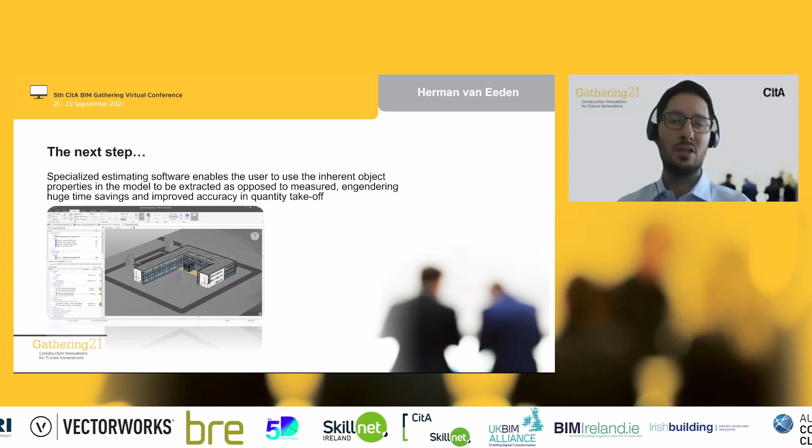So the next step, and the way that we will try to alleviate this, is for us as quantity surveyors to also come out of the dark ages, so to speak, and keep up with the technology, having some technology of our own that helps us take off and give us improved accuracy of these quantities that we love so much.

And what that translates to in our solution called iTWO costX is it enables you to do a rapid analysis of comparative designs and run different scenarios through the process a bit faster, giving you a whole project cost idea and the time savings associated with extracting those quantities quicker.

It gives you increased accuracy, like I said, with greater certainty of the cost. It also gives you live links between the elements that you see on the drawing into your estimate or your bill of quantities, with apparent benefits of that.

And it gives you the ability to feed back into the design team a bit faster or at an earlier stage, and makes the approach a bit more collaborative, involving yourself in the design process as well.

I'll swap into iTWO costX to give you a short demonstration of the solution. I've got it open already, and for those of you who have never seen it before, I unfortunately will not spend the time to go through a full demonstration.

I will just show you a brief demonstration of it, but we have a wealth of resources on YouTube and on our website, and we are happy to do live demonstrations for you as well if you are interested in seeing what the solution is capable of in its entirety.

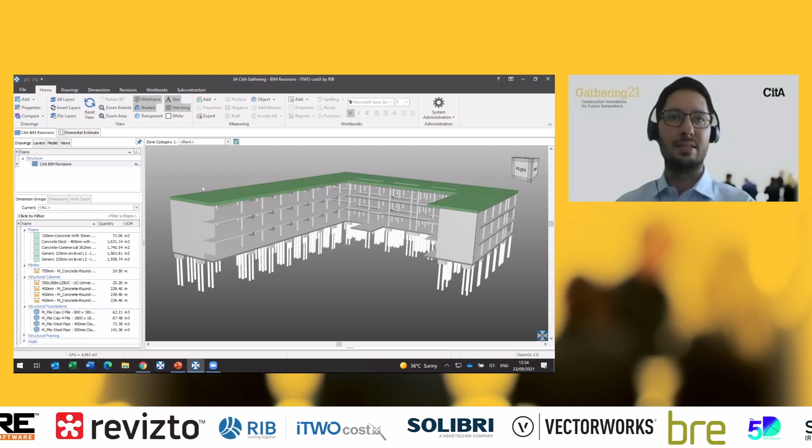So in short, we basically have what we call a dimension view, and you can see that on the left-hand side. This is where you would have all of your drawings as well as your dimension groups. Then we have the costing view where we have our workbooks, and this is where you would have your estimates or your bill of quantities.

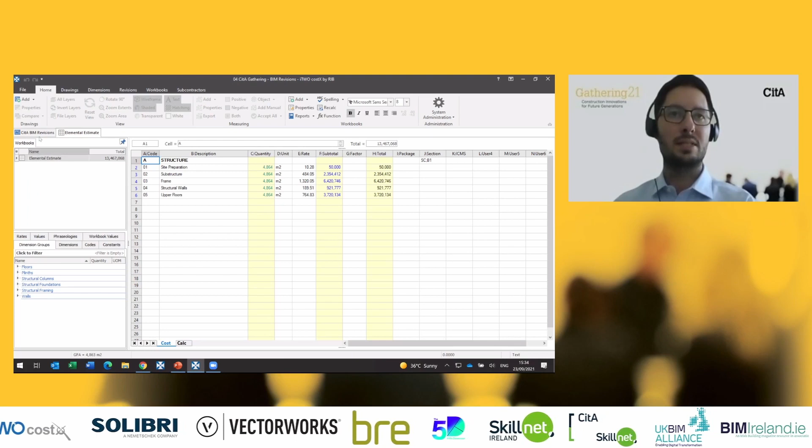So on the dimension view where we have our drawings, you'll see I've got a 3D drawing imported in here already. It's a very basic structural model. We support quite a few different 3D or BIM drawing types, Revit being one of them, and then IFC and DWFX being the two that are probably the most widely used and the recommended ones in terms of performance.

Within costX, you can import the model and explore the model and all of the object properties associated with that model. So the benefit of this is you can go and find and see what it is in the model that you will actually use for your descriptions and in your bill of quantities or in your estimate.

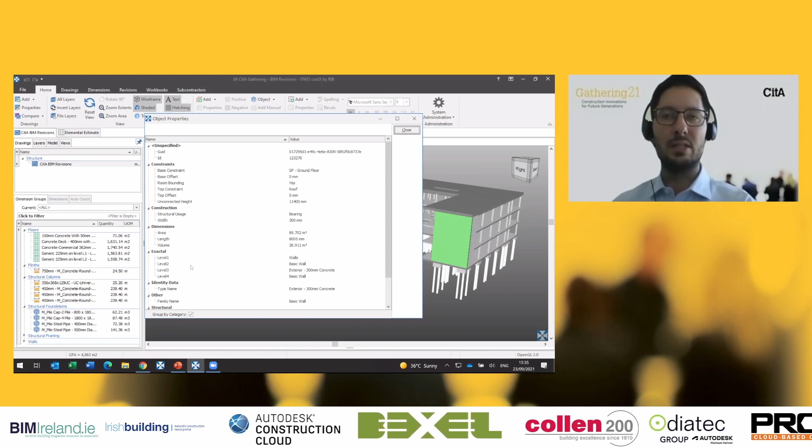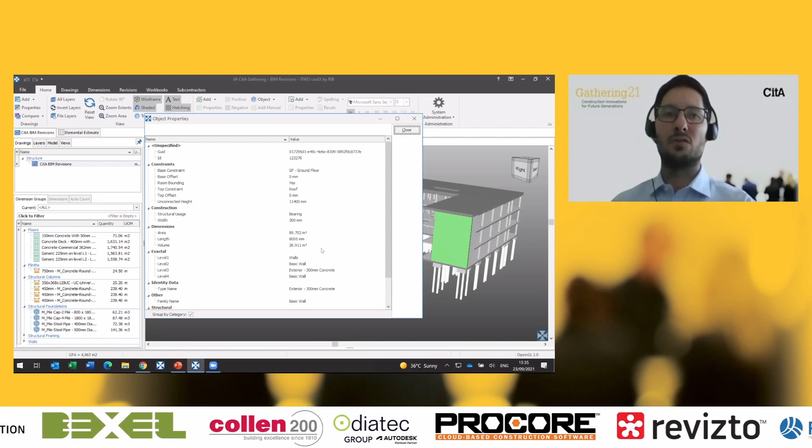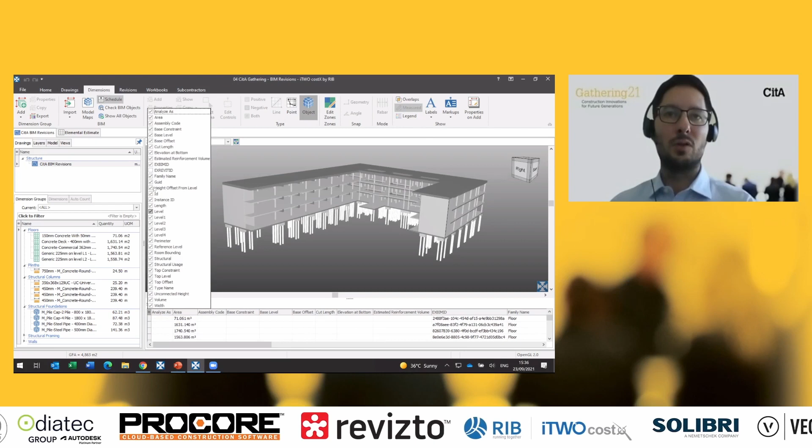Things like the dimensions, possibly some of the materials identified here, or the sizes. Now, there's a whole other conversation about verifying the quantities - that's obviously also possible, but for the sake of this presentation I won't go into that detail. You can also view all of those details in the drawing schedule or object schedule at the bottom, which is essentially a list of all the object properties displayed within the model, and you can filter that according to the columns you require.

Now, how we go about measuring, there are a few options. The first few we'll just briefly skim over today. Essentially, you can manually measure on the drawing as you would on a 2D drawing, or you can import using either a template we've already developed, which is more generic, or you can create what we call a model map, which is essentially a user-defined template.

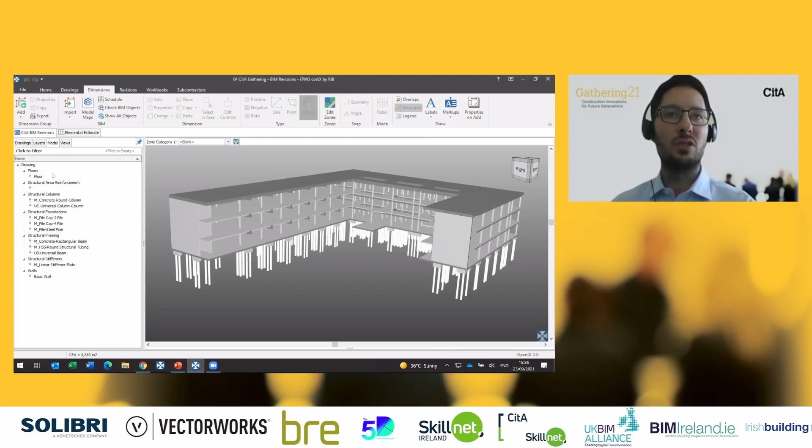With these user-defined templates, you work your way through the model tree and define how you would like each item measured, based on the information in those object properties we mentioned. You then run the import using that model map, and it produces the quantities for you.

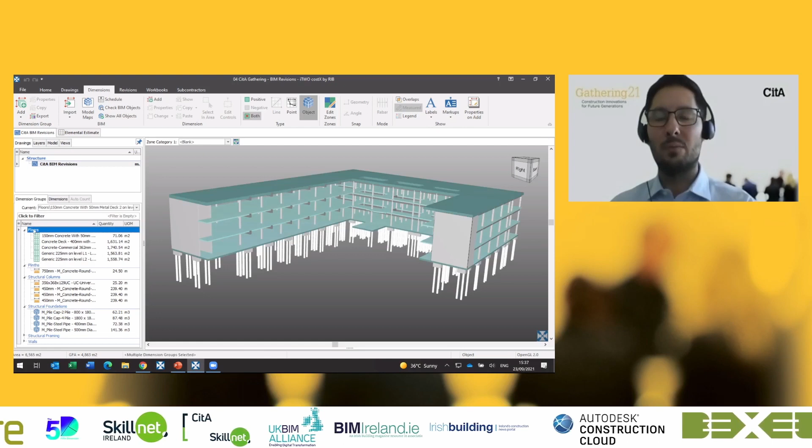You can go and validate those and see where they've been measured. Because I did it all in bulk, it's all in the same color, but you can run different colors against these dimension groups. You'll see them highlight on the drawing as I move through those different items.

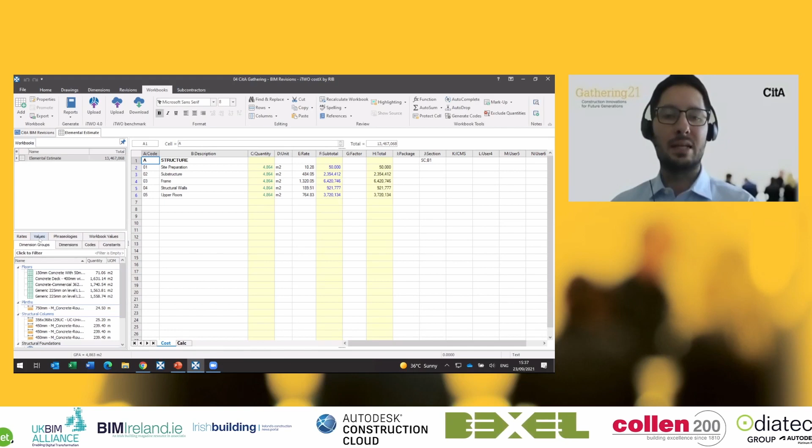Then you go into your workbook. Mine is a very basic estimate layout, similar to what you might be familiar with in POMI. You can set it up according to any of the standards you use, whether that's POMI or NRM. And for the detail, you then go in and create your live links.

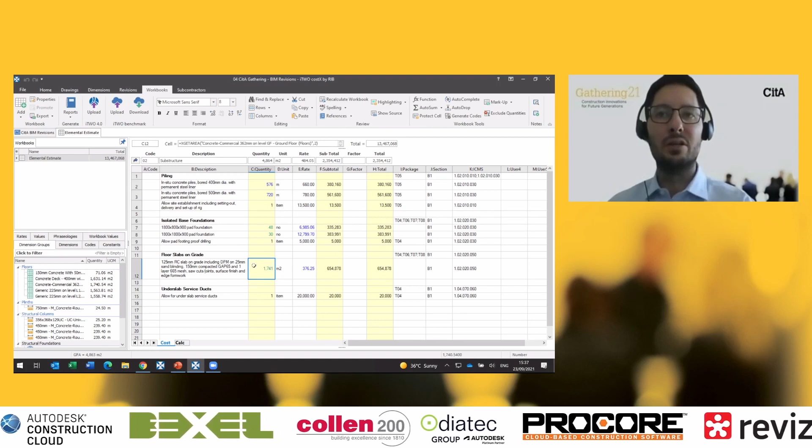So for my slab on grade, a live link is defined by the green item - a green item is a live link. That gives me the ability to click the show source button, and it takes me to the drawing or item and shows me where it is.

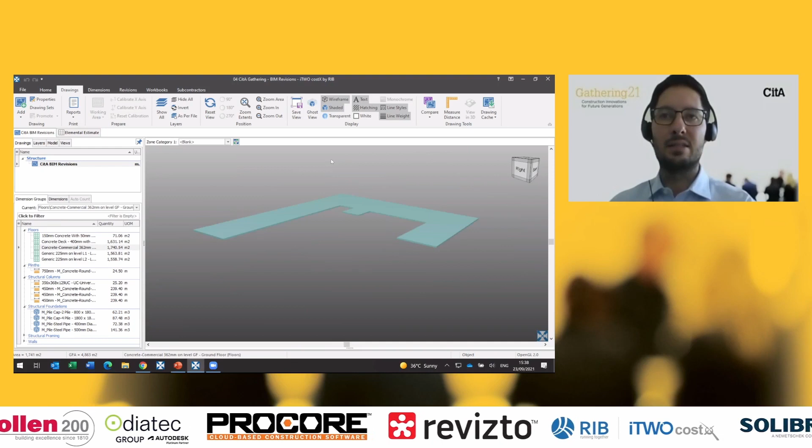I'm also able to isolate items - let's just zoom out a little bit - isolate, highlight, and filter the drawing to see and inspect certain elements of that drawing. I'll just turn all of that back on to get my drawing back.

Then once you're done with your estimate, or possibly even before you're done with your first estimate, the nature of our job means we'll obviously receive our first revision or revised drawing. And luckily, CostX lends itself to improving that workflow significantly as well.

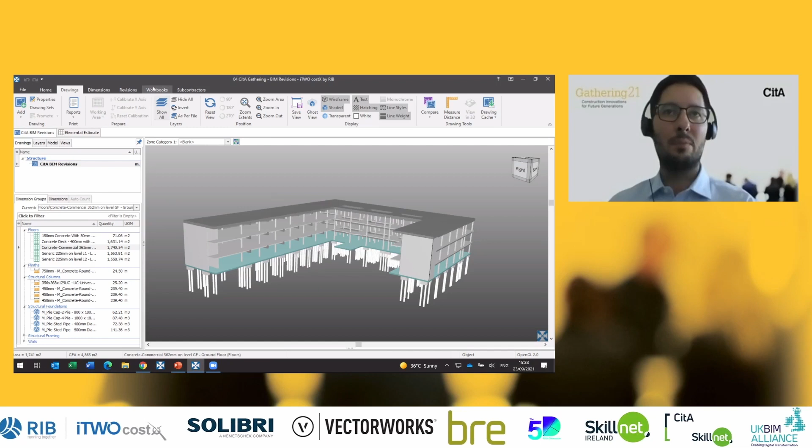Instead of doing a full remeasure and reinventing the wheel, because you've already mapped out and created your model map, it's actually possible to measure using that same model map. You would compare the different model trees and see that your definitions are still relevant and correct, and haven't changed too dramatically. For the most part, it should all still be relevant.

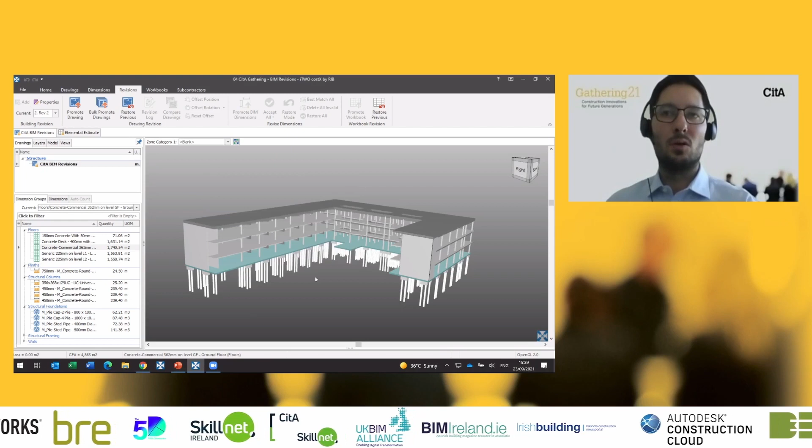So you go and create a new revision, and once you've created it, you'll see your previous revision gets locked - the padlock shows you that it's locked. That then gives you the option to promote the old drawing to the new or changed drawing that you have in your file.

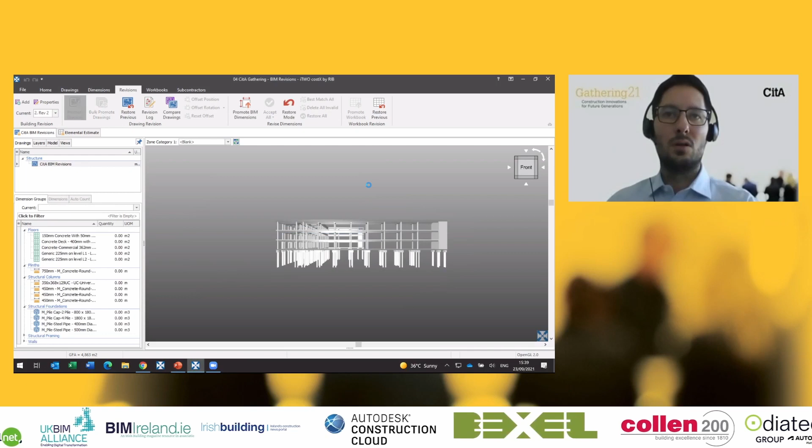Once you've promoted the drawing, you can keep track of it with the drawing register. You can give it a new name if you want, and click the update button. You get a warning sign saying the previous revision contained BIM dimensions which haven't yet been promoted, so first you should verify the unit of measure in the schedule.

Then you can set the external properties file for the new revision if applicable. The external properties is another really good aspect of CostX, in that as the QS you can actually add your own user-defined properties to the model as well. So if that's maybe a costing code you want to include, or an elemental code or trade code, or whatever you want to add to the model, you're able to add that as an external properties file to the drawing.

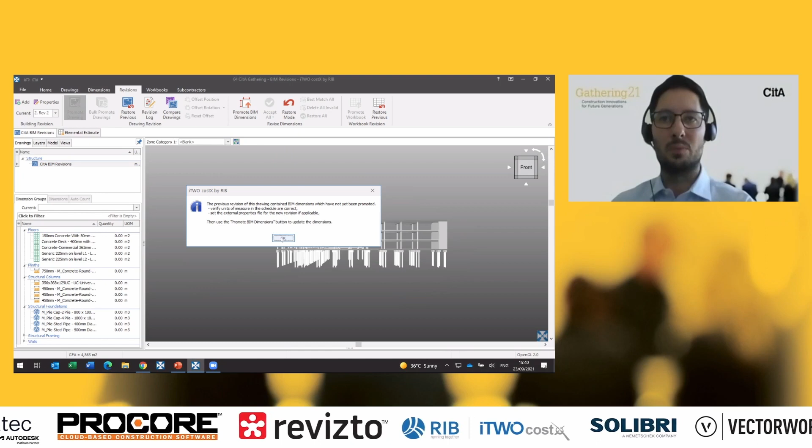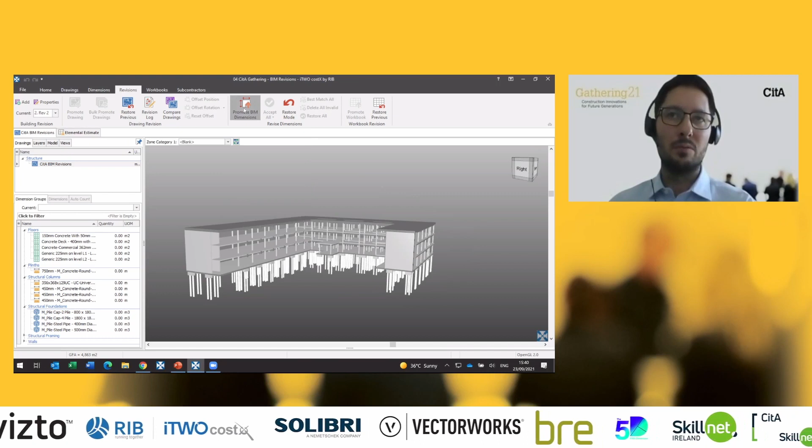After you've done that, you can go and promote your BIM dimensions. CostX will remember what your methodology was to measure your original drawing. Once you click promote BIM, you'll see all of my quantities have been zeroed. You can click promote BIM dimensions, and that will run through the previous measurement methodology and pick up

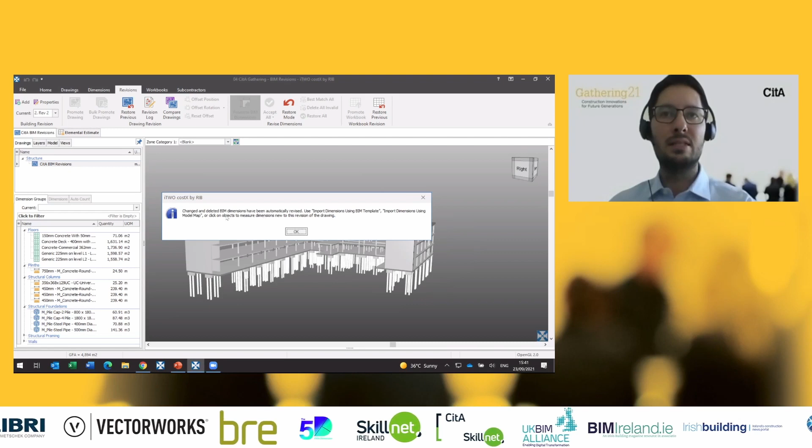all the items that have been measured and verify their consistency, their quantities, and all of the items that you've measured. Then you get another warning saying any changed or deleted BIM dimensions has been revised. However, you should use the import again to ensure that any new items has been picked up.

Just the technical side of how that actually works: each item in the model has a unique identifier attached to it. The benefit of this is, first and foremost, that it ensures you don't duplicate or measure anything twice. It also gives CostX the ability to validate those items, first against duplication, but also to ensure they've been picked up and adjusted in here.

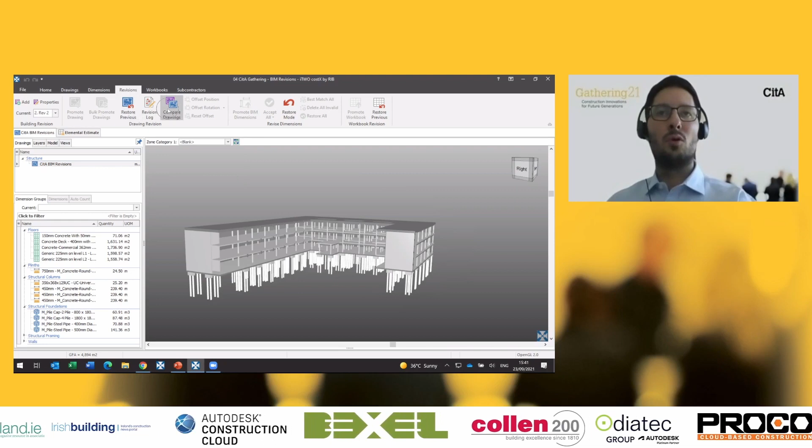Now, before running that import again, I'll do a quick drawing comparison. You can compare it to any of your previous revisions. I only have one, so that's the only option. That overlays the two models for you and shows you all of the changes that have occurred.

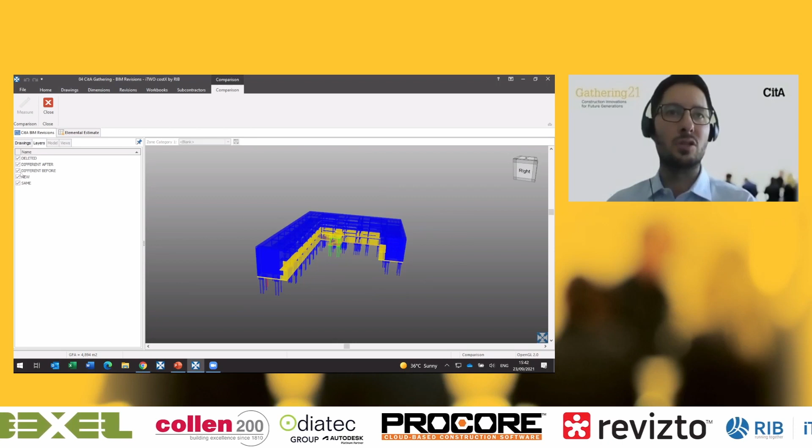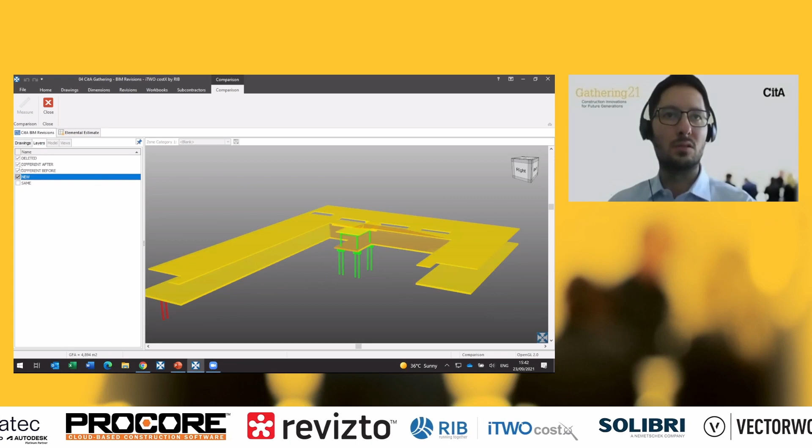You have different layers available to show you the items that have stayed the same, if you want to hide that. Any items that changed show as different after and different before—this can be with regard to orientation, location, or even size. There are layers for any new items and any deleted items as well, which is a really useful visual aid to identify quickly where the changes have occurred.

Then you go to your dimensions and choose to import again using your model map. You'll see model maps—when you create one, you won't see it here. When you create it, model maps are either global or project specific. In this case, it's a project specific one we've created for BIM structure. That will run through all of the items again, won't duplicate any of them, but will pick up any new items, like that warning told us it would do.

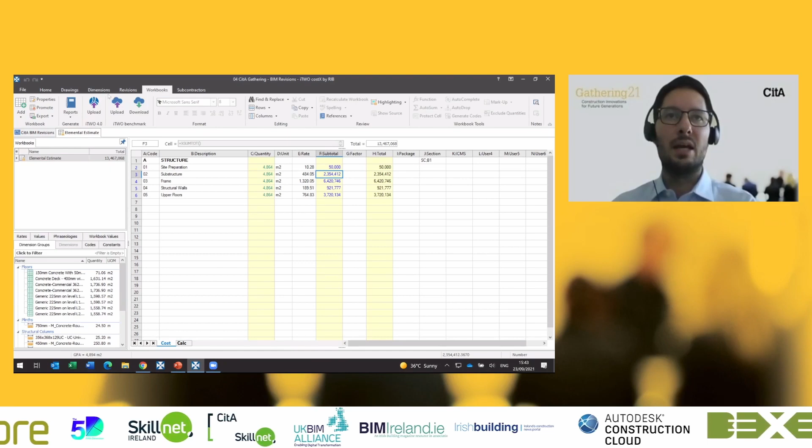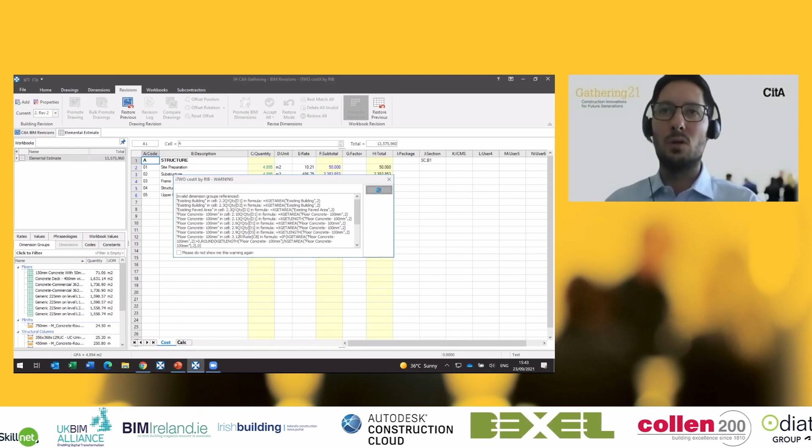Once it's picked up those items, we can go to our estimate and promote our workbook as well. Because we have the items live linked, the benefit is that it will validate the quantities and change the quantities.

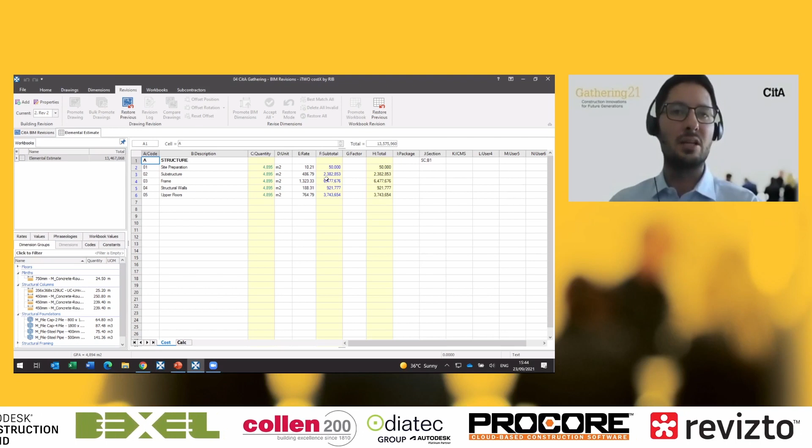I see that some of the items have actually changed in their description, which is why it has created new items—in my mind it wasn't supposed to do that. But because it's a live demonstration, it has gone ahead and done that, so that would need some further investigation. Sometimes a property does change to some extent, and you need to investigate that.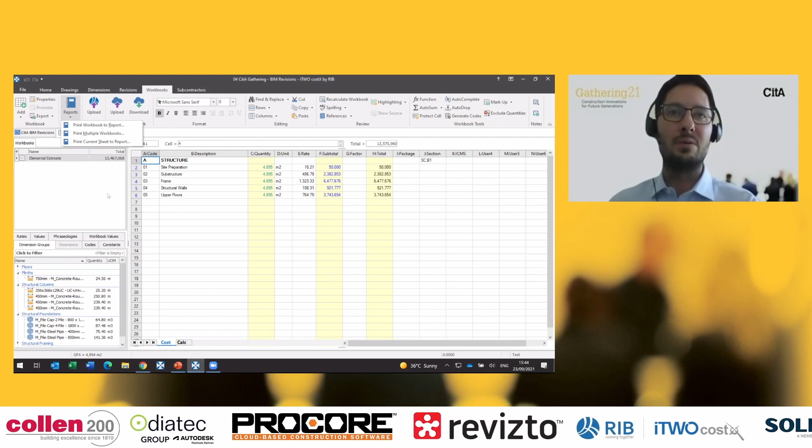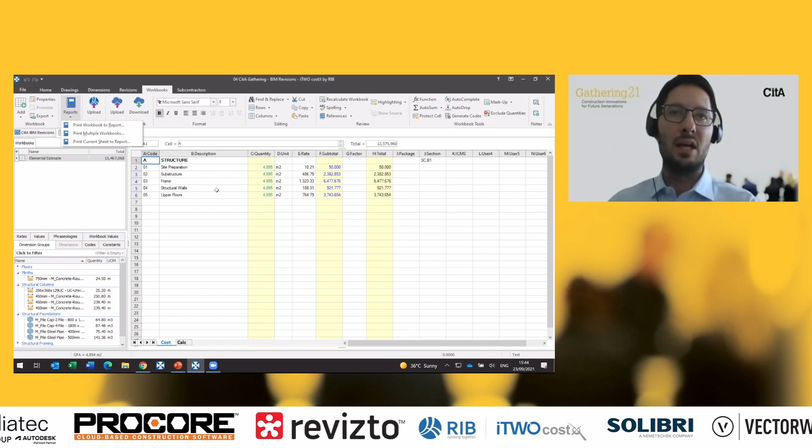But after you've done that, you can generate certain reports within your workbook to do comparisons across the different revisions, view them side by side, and see the effect it's had on your total in terms of quantity, and possibly even in terms of cost as well. And that essentially is CostX and how we manage revisions in there.

To bring it to a close, in summary: BIM can be employed to quickly measure and analyze alternative costs of different scenarios and revisions on your drawings, enabling you to give swift feedback to both your designers and your clients. By implementing this kind of software as the QS, it gives you the ability to facilitate a collaborative BIM workflow for all stakeholders involved, improving building design efficiency and performance.

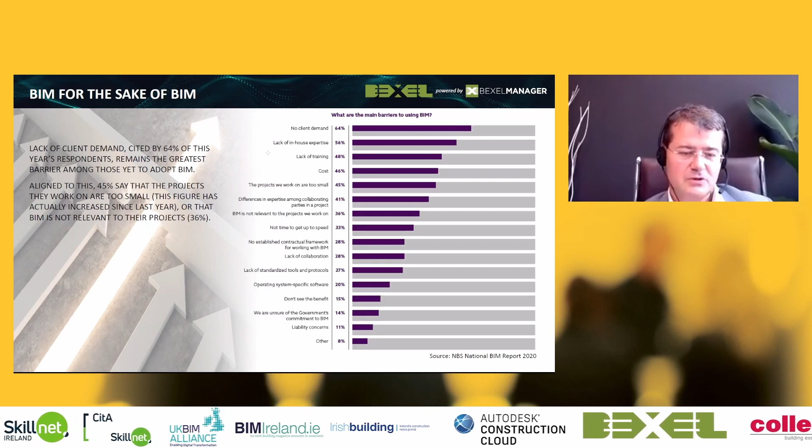McGraw-Hill stated that in design stage, it's more or less okay, could be better. But in construction stage, where BIM is even more important because this is the cash most intensive phase with the most risks and challenges, more or less everything is done in traditional way. That's the challenge, and we have to deal with this. It's a question of our technologies and also education.

Same idea - construction schedules, cost items, thousands and thousands of tasks and cost items. We need to transfer the industry to have more assembly line principles, and this is research done by McKinsey, showing 5 to 10 times productivity boost. Whenever I saw something done manually, 10,000 tasks created manually, I say, come on, did you really do that? And how much time did you need to do that? So we need to have automation in this.

That's why we've been involved in ISO 19650 and PAS 1192. Those standards are really great and very important, but as with every standard, they are a bit vague, because we need consensus of all participants, all countries, and so on. That's why we created digital transformation packages where we deliver to clients really specific documents, data templates, checklists, and templates of reports, which immediately helps implement this at a proper level - not just theoretical, but practical as well.

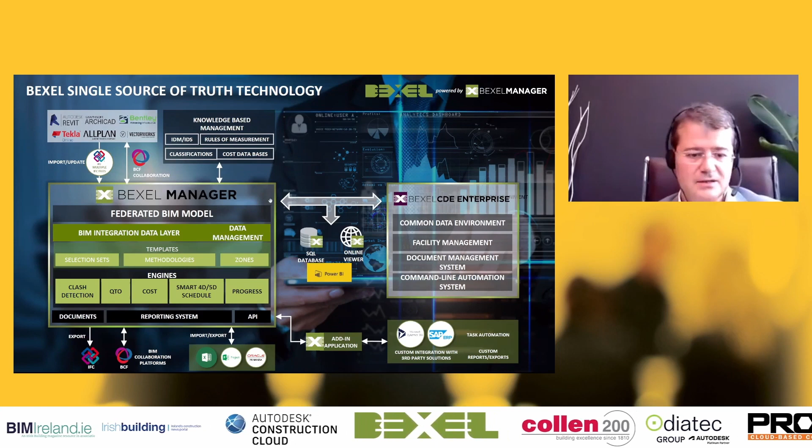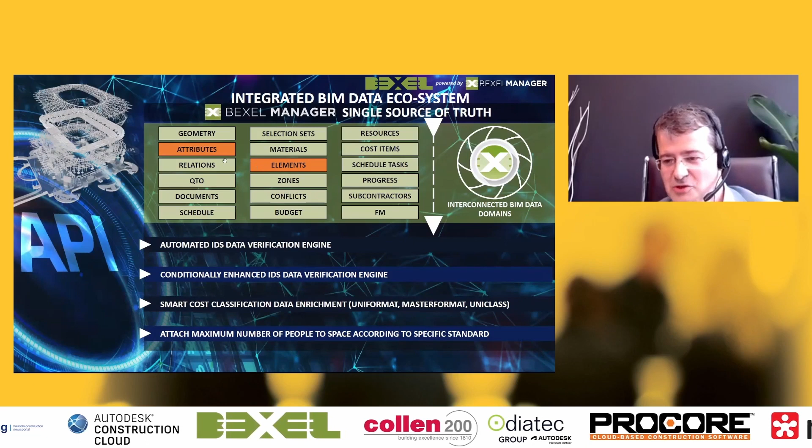These are our 18 domains we have at the moment. By combining those domains - let's say in this case just attributes and elements - it's information delivery specification and automated data enrichment. If you add cost and schedule, then we can send back to designers cost and schedule information generated in the system, or automatically create look-ahead plans and so on.

When we have conflicts and zones, we could have clash detection, but robust systems - organize clashes, let's say per time of occurrence on the site, or have containment analysis and so on. When we have subcontractors, we can create look-ahead plans according to subcontractors or other very advanced reports and analysis. If you have progress, we can have very advanced earned value analysis, CPI, SPI, and other KPIs, very important and crucial for project management.

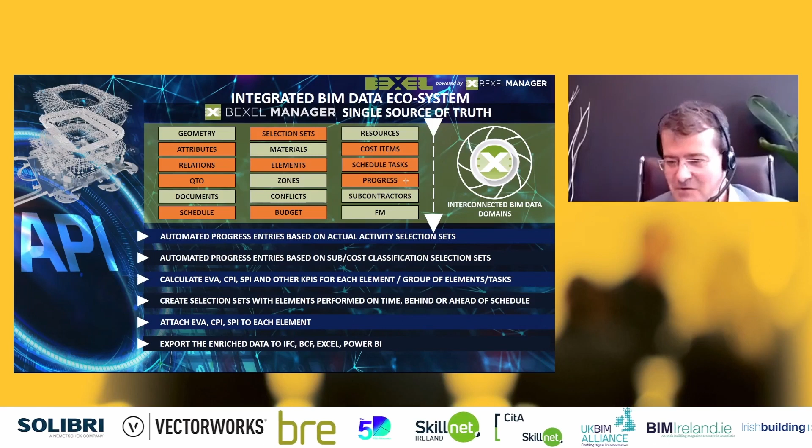We always used to say that everything is about the data. That's why we call it building information, not building visualization model. The idea is to replace existing workflows first and then add gadgets on top. 4D simulation, we've had it for 15 years in our system. It's nice, it's useful, it's attractive, but if you don't have data, you will still manage the project in the traditional way. That's what we would like to change.

And of course, if you have all domains, you can have full integration with ERP platforms, full data enrichment, reporting services, and various other benefits.

Here is one example. We always start with data checks, quality checks, and geometry checks. This is one of the workflows - you can have a number of workflows in our system. So create cost classifications and automatically create tasks. The idea, as I'll explain in a second, is to utilize existing data first.

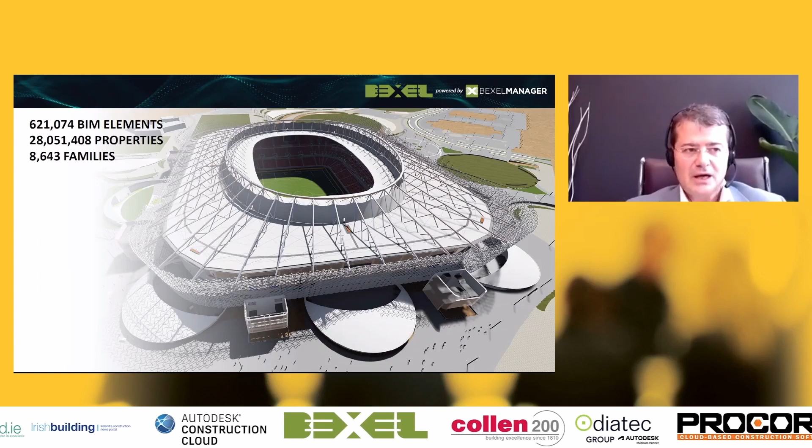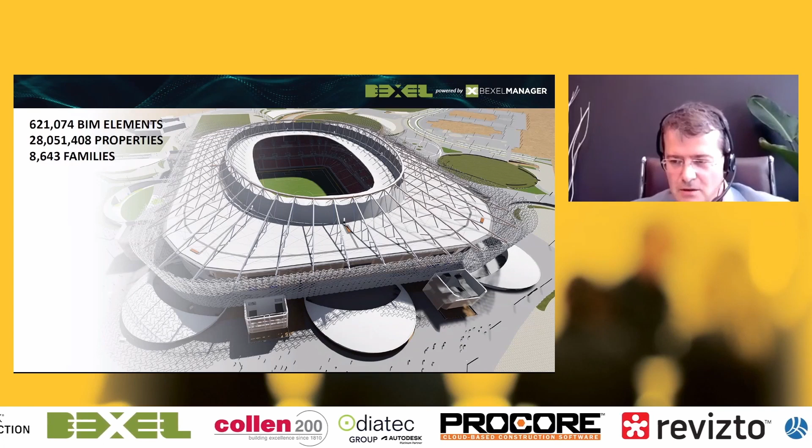This is one project for the next World Cup. Actually, it's finished now, so I can talk a bit more about this. When we started working on that project, the model had 620,000 BIM elements, 28 million properties. Today we have around 50 or 60 million properties and 8,000 plus families. And again, how was the schedule generated? Manually. Quantifications - more or less everything was done manually.

So we forgot about the huge amount of data, relations, everything, and did it from scratch, then manually connected this with the BIM model. Very interesting workflow. It took them 1 year to develop 10,000 tasks for this project in the traditional way. With our system, literally in 1 hour it was generated, and it was 50,000 tasks with relationships. But what was different is that we took a methodology, and that's the way how this is generated.

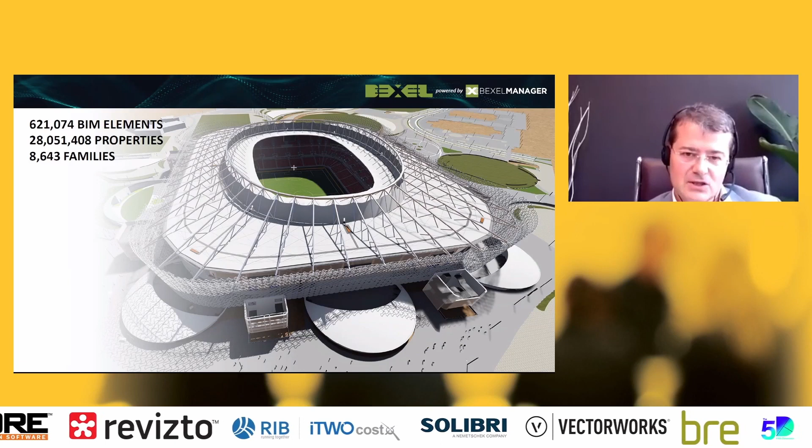That's why when we talk about 4D and 5D, we're talking about maturity levels, because everybody likes to talk about 5D, 4D, 6D, 7D, but where are we in the maturity of those processes? Here are 3 levels, and how fast those processes are. The first one is traditional: select the elements, manual quantification, various tools, connection with Excel spreadsheets, and so on.

The second one, a great example of which Herman just presented, is literally: you have cost items, then you connect this with quantity formulas, assigned items. Just to mention, Bexel is not about 2D - we don't support 2D because we believe the future is in 3D. But of course we understand 2D still has to be supported for certain projects. Then you attach those elements and have automatic quantity takeoffs and calculations.

Everything is very good. The challenge is that sometimes we don't have good cost databases which perfectly match the elements. So we have 10 BIM families with doors in the model, and another 100 in our cost database. First we have to enrich the database, then update this cost process, and that's not too much additional work. The idea is to automatically, based on the model, generate cost items and combine them with existing classifications, using all the properties so the system will automatically create 10 door types or even additional subtypes of the door for your project.

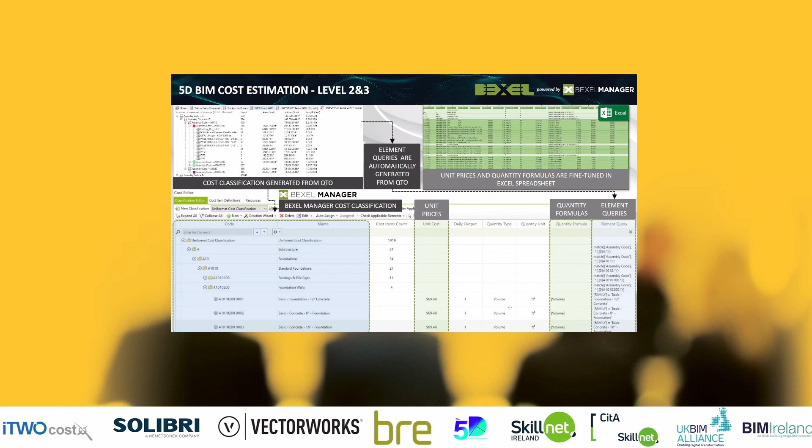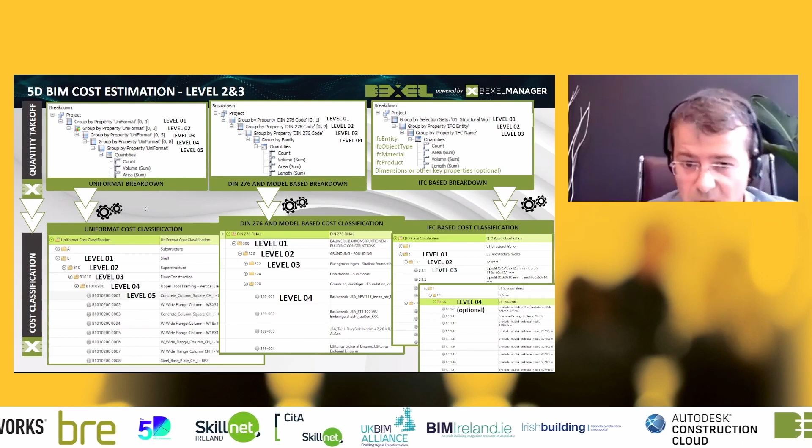Here's another example where you see this Uniformat classification, but this is German DIN 276, or could be IFC based, Uniclass, Chinese standard, Indian standard, Russian standard. We have examples in Italy, in Spain. Actually today there was a great Politecnico Milano example where they did an excellent bridge project with full Italian standards, and that's completely easy to do in this system.

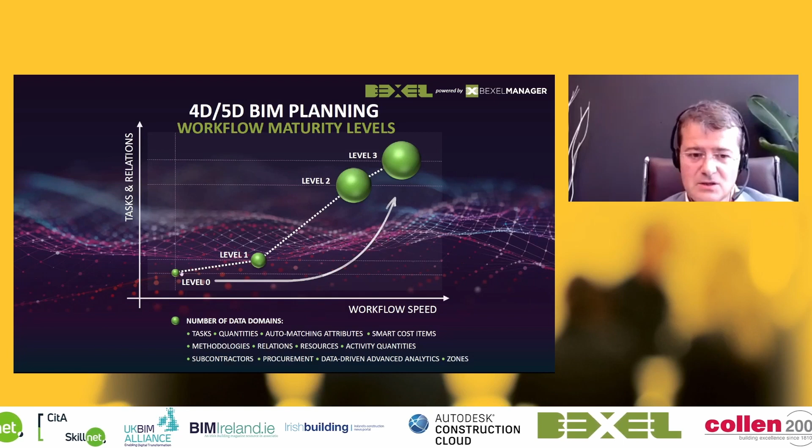The next thing is about 4D. Again we have 3 levels. The 2 standard levels are most popular: okay, I have a Gantt chart developed in, let's say, one of the most popular platforms - I won't name it. And then we have a BIM model, and then you just manually match those thousands of tasks and elements, and that's it.

But where is the planning done? In a traditional tool, not in BIM. So it's not BIM driven. We forget those millions of properties and data and start from scratch, and it's prone to error and mistakes.

Advanced level 1 is auto match. In Bexel this could also be done, but to do that manually is a huge amount of work. And whenever you change something, again huge additional work has to be done. So theoretically you can do that, but in reality you won't. Looking forward to showing the example of when it's done properly.

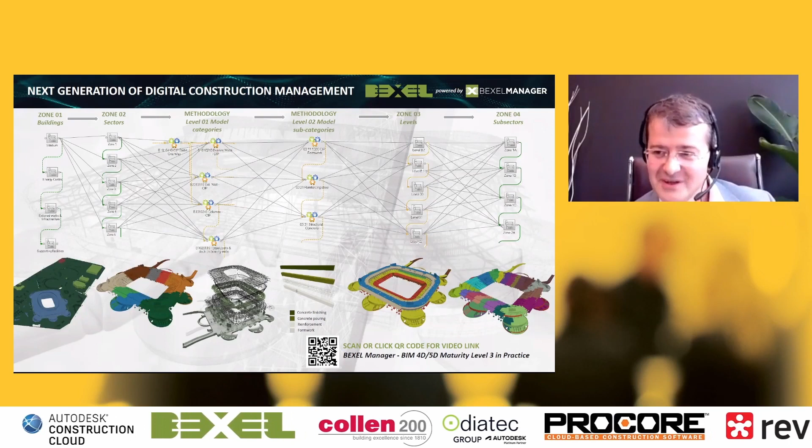This is an example from this World Cup project. With just 120 nodes created in one day, the system generated more than 50,000 tasks and relationships. Fortunately, the project is now finished. Was it on time? No, there were some issues with the roof, but that was not related to BIM, it was due to some design issues. Fortunately, it's finished now.

This is why we started with flow lines. Here's an example: the flow line for the Empire State Building, the tallest building for 40 years, built in less than 400 days. Today we would need at least 2 to 4 years to do that. It was developed using flow lines, not Gantt charts. Of course, Gantt charts and the critical path method are very important, but both analyses matter.

In progress monitoring, it's the same issue. Whenever I see something is 50% finished, I say, come on, really? 50%? How is that possible? It means it's not accurate. So the traditional way has this problem.

The second approach, where you put 50, 20, 30, those nice round numbers, is okay, but the idea is to have a full BIM-based level 2 look-ahead plan, sending the site what has to be done in digital format.

Per each subcontractor, per each trade, and so on, then just fine-tune the progress and send it back. And then you will say, okay...

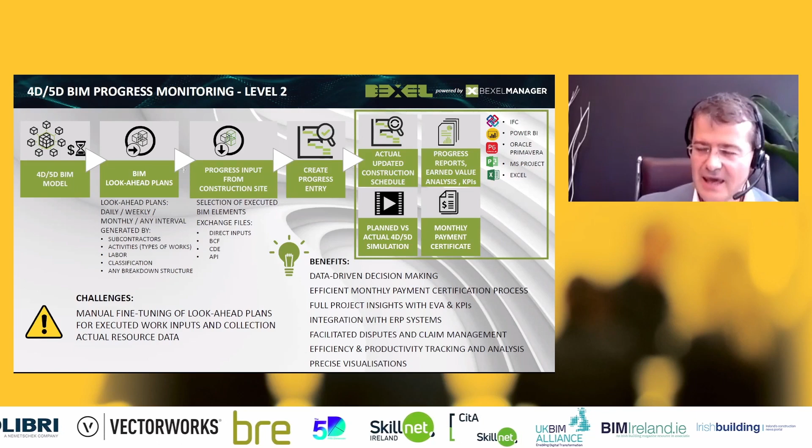84.6%. It's trustworthy. Whenever you have disputes under Red FIDIC, I'm Vice President of EFCA's BIM and Digitalization Committee, you spend so much time trying to get an accurate measurement.

And that's what has to be improved. Of course, if you add laser scanning and certain additional automations, this can be even more accurate. So the idea is to utilize what designers spend one or two years developing, across all phases of the project.

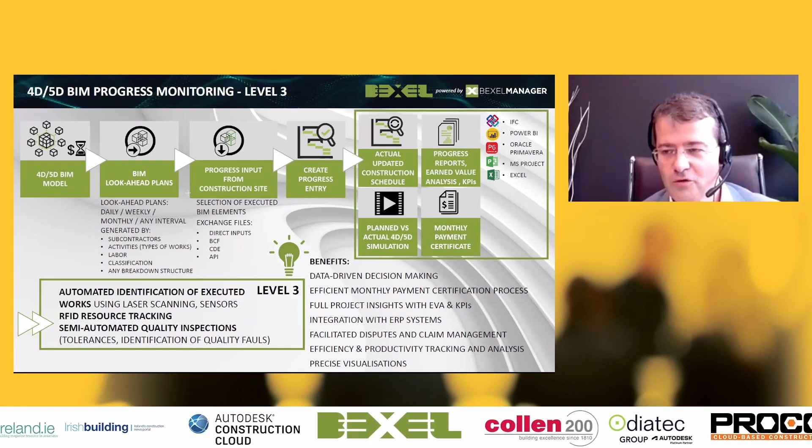Our look-ahead plans could be organized per subcontractor, per resource, per month, per day, and so on. So you can literally control your project in whatever way you would like.

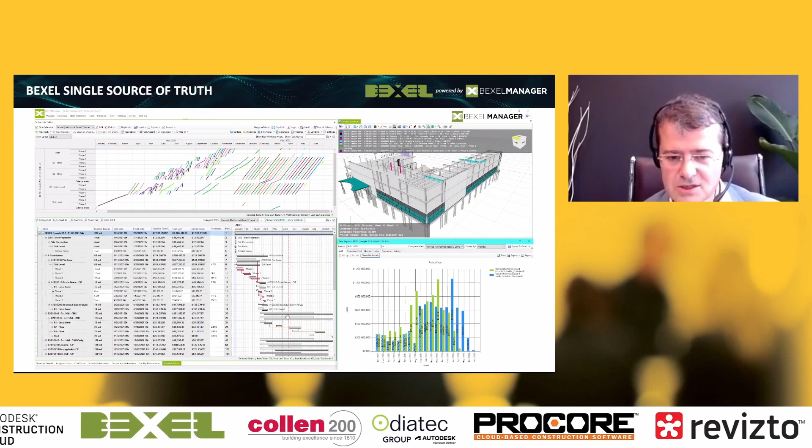This is one of the reports. You have a Gantt chart, earned value analysis, all costs, all tasks, cash flows, line of balance, and at the end, simulation. Very nice, you can watch those videos.

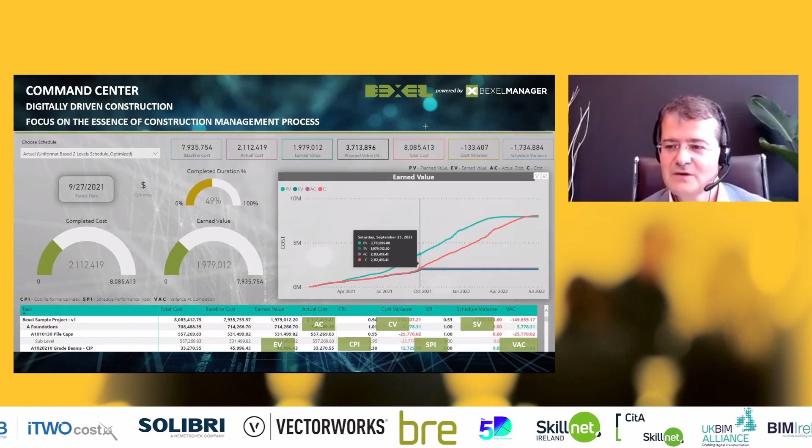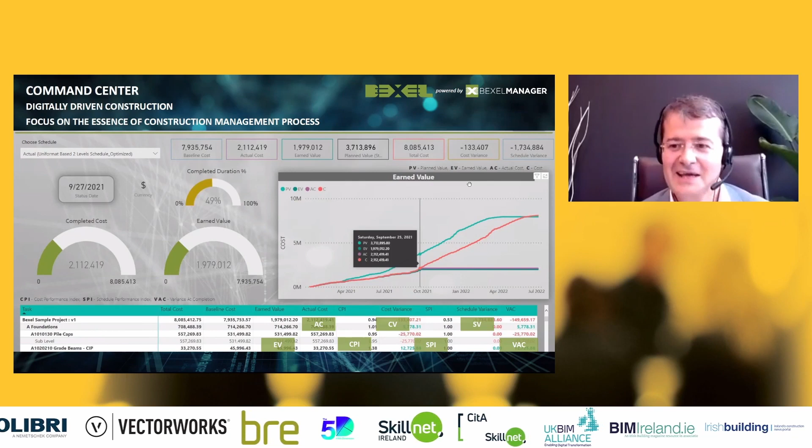These are earned value analyses, just to show that with those six numbers per each task, you know where you are in the project, and the director of a construction company can manage it. Unfortunately, he often doesn't have this earned value analysis, or only gets it at the end of the project when it's too late. That's the idea here.

These are some sample reports: cost performance, schedule performance indexes. You don't need to add any additional information or input, because you're just taking the data you already have in the system and using it efficiently. These reports are very important.

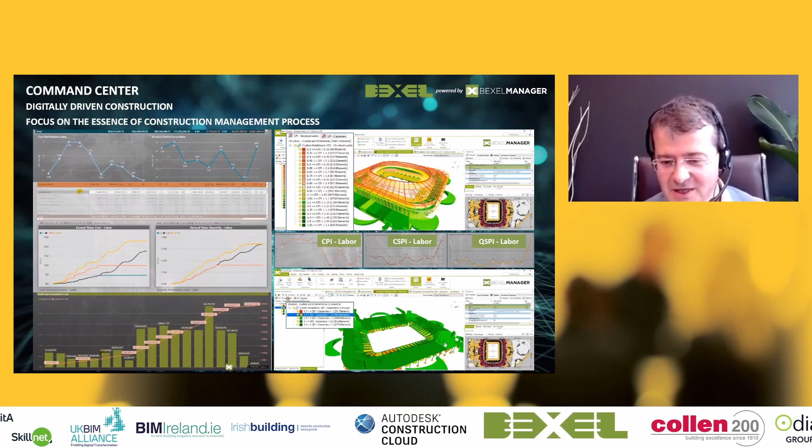With this, you can visually see where you spent more money than planned and where less, or where carpenters were more efficient and where less. When you have that data, you can manage the project. Otherwise, it's just guesswork, hoping your experience will somehow cope with the project's challenges.

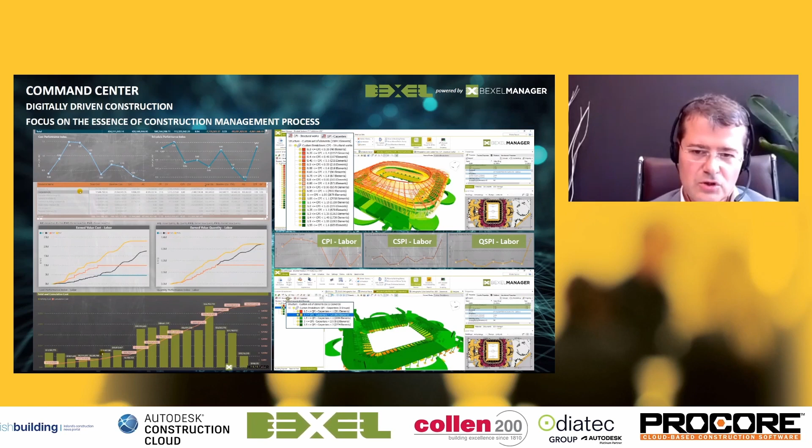Just to show you one case study for the end: this is the tallest building now in our region, Southeast Europe.

So it's 150,000 square meters in total. In a traditional way, it took 3 months to develop a schedule without quantities, just tasks and relationships. For manual quantity takeoff and cost estimation, it took 6 months. The schedule didn't have quantities, resources, and costs.

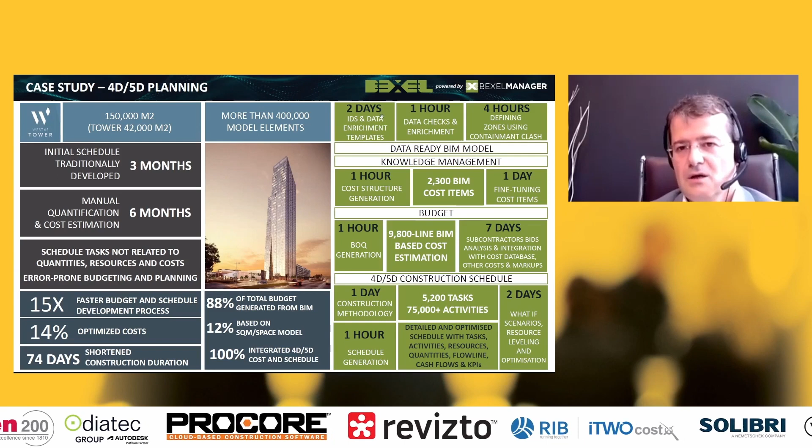On the other side, the digital workflow was 2 days for information delivery, specification, and data enrichment templates. Just 1 hour for data enrichment and data checks. 4 hours for defining automatically zones and containment clash and fine-tuning it. In 1 hour, fully generated cost structure with 2,300 BIM cost items—those are full cost items—and 1 day for additional fine-tuning and checks.

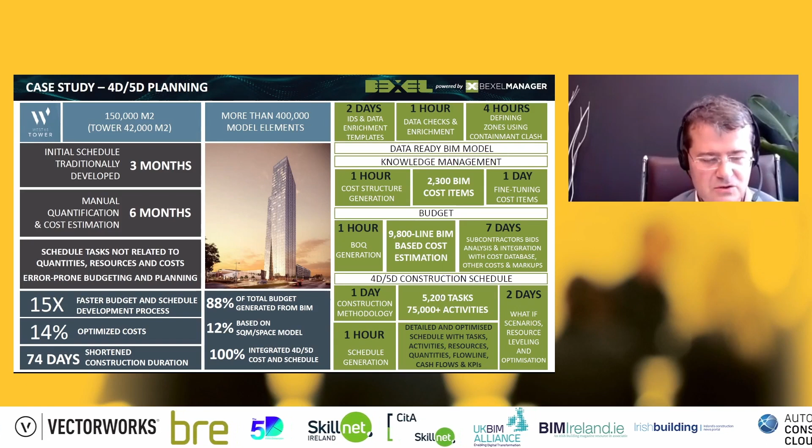1 hour automated—literally a couple of minutes, but let's say just to verify if it works. 1 hour for BOQ generation with almost 10,000 line items. Then 7 days for integration with cost databases and communication with subcontractors. 1 day for construction methodology, 1 hour for schedule generation, 5,200 tasks, 75,000 activities.

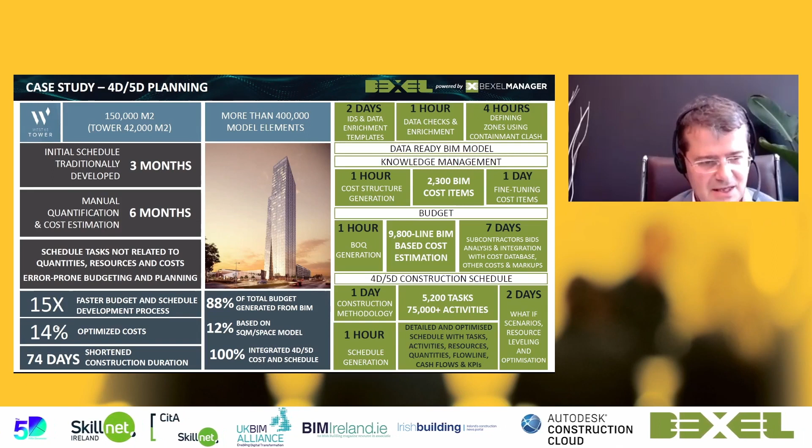If you're interested, you can contact the investor and see if they are satisfied with this. Then at the end, in 2 days, what-if scenarios, fully optimized schedule. So 15 times faster schedule, 14% optimized costs, and 74 days faster.

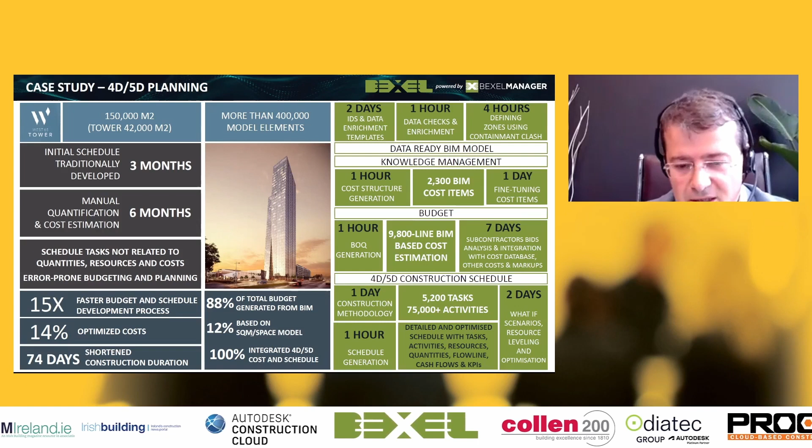88% of the total construction schedule budget is generated from BIM. 12% are generated based on the square meter model, and in total we had 100% integrated 4D, 5D cost and schedule.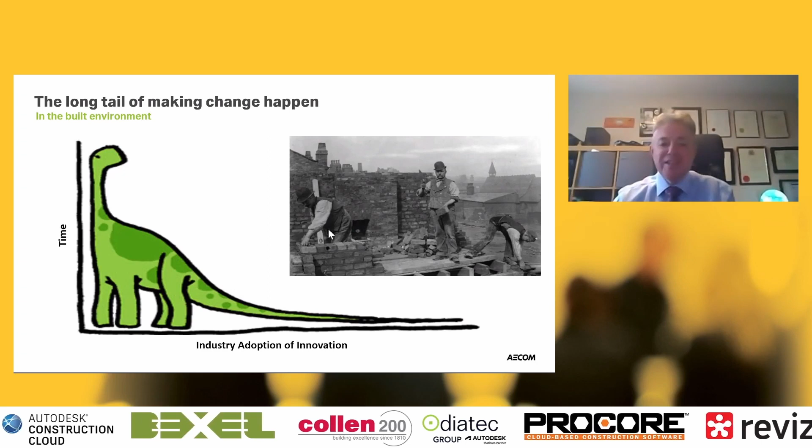We've also talked about this long tail of making change happen. Look back to the Victorian era, and there's a Rudyard Kipling poem called A Truthful Song. Paul Morrell, our ex-construction advisor, was fond of quoting a conversation between a Victorian house builder and one of the pharaohs.

Apart from the plumbing, he recognizes everything that a house builder is doing. The poem goes on about how little things have changed in the building trade. I think that's so true. You can look at the difference between the two pictures—has much changed?

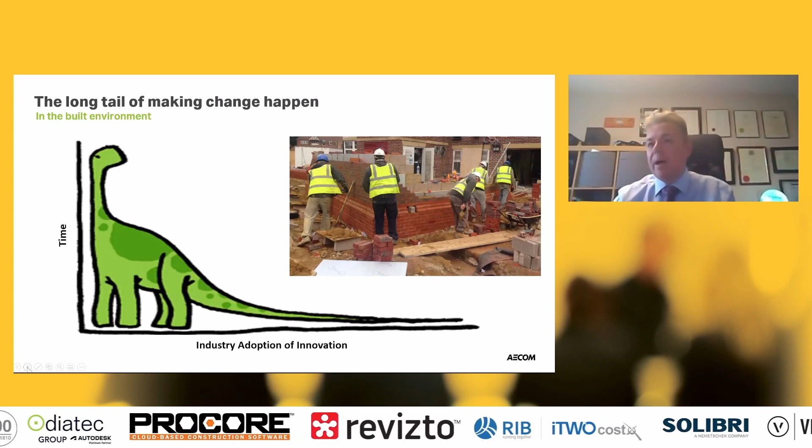We've got a wee bit more safety in terms of what we're doing, we've got high vis now. But actually I'm really hopeful. I look at some of our team today—this is some of our AECOM team, these are the digital natives. The work they're doing in terms of how things are changing is so important.

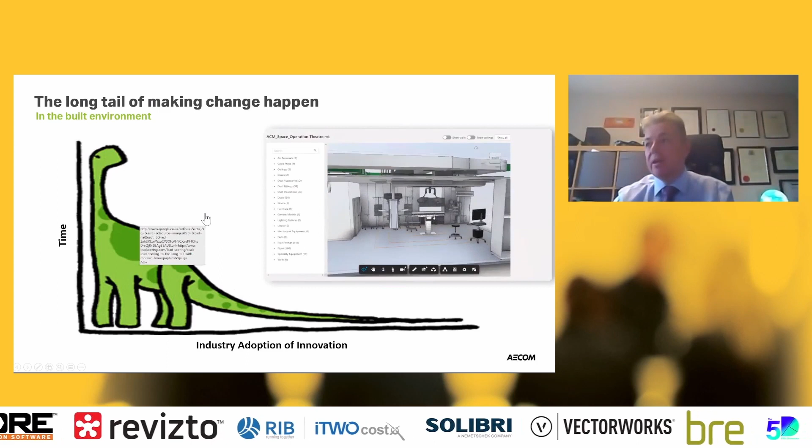Look at how they interact—think about renewable design data. We're no longer looking at simple 2D CAD drawings, they're making much more accurate ways of doing things. So I'm hopeful that long tail—it's been a decade since the BIM mandate in the UK, and now we've got an information management mandate, we are making a big difference. I think the next generation, Generation Z, will move that dial for us.

But let's go back—the technology has been about for years. Look at that statement: we need to improve efficiency of construction, better procurement reform, more collaborative approach. So here's a question to everybody: sit for a second and think, when did that quote get written?

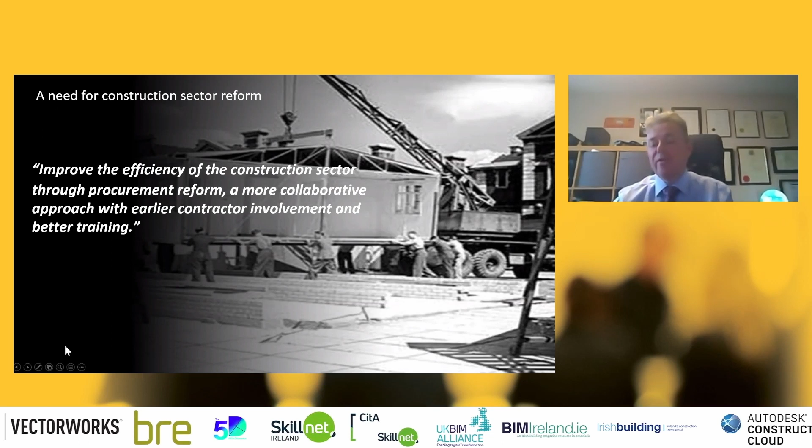Mark, any ideas? Sorry, I was on mute. I'd say it's probably, we're looking at 100 years ago, I'd say.

You're right, almost—1944. We're still talking about the same things. You can see that picture—there's some degree of modern technology, some degree of prefabrication, but we were asking one department to change. We weren't thinking about procurement form, we weren't changing models, we weren't changing mindset. I think that's hugely important going forward.

But we are talking about Industry 4.0, and what does that offer? UK Research and Innovation gives an idea—it's about enabling a new frontier in terms of project delivery. It's about supporting better, safer related decision making. The big part of it is real-time access to information that's more transparent with better interoperability.

One of the big things as well is more focus on off-site, advanced manufacture, modern methods of construction that are going to take high-risk activities off the site and into the factory. I think for young people, that's going to become much more appealing.

You can see that came out a little bit—there was a young David Philp back in 2015, six years ago. I took a stab—not at Industry 4.0, but at this model of Construction 4.0, my quite dangerous, half attempt, to look at the model.

But I think the main thing is, whatever definition we give it, the big change brought by Construction 4.0 seems to revolve very much about decentralized connection between physical elements and physical spaces and the cyberspace, where there's that degree of ubiquitous connection.

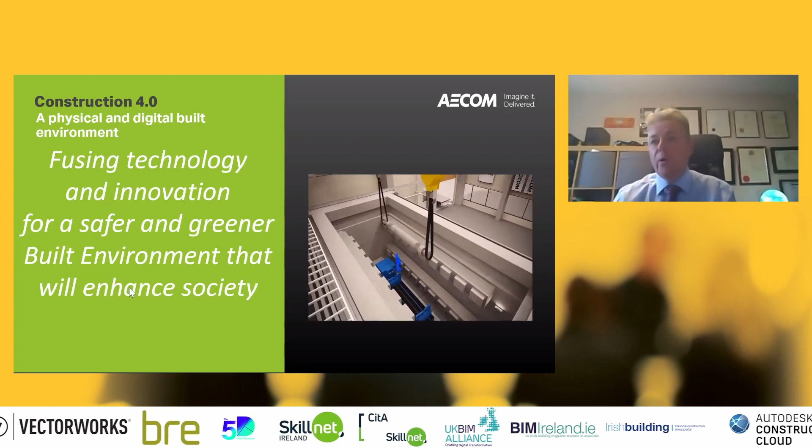At AECOM, we actually see it as simple. We think about construction 4.0 as a physical and digital built environment, and BIM helps us blossom within there. But the big thing is about fusing technology and innovation, with very clear goals where we want to do it with clear value for a safer and greener built environment that's going to enhance society.

If we frame the understanding of infrastructure as a systems of systems approach, one that's focused on improving outcomes for people and the planet, then that systems of systems approach is really important to examine.

I want to examine it a little further - you can see some of the key goals, which I think were actually quite similar to my 2015 model. But one of the things that I think is a complete game changer was published the other week.

In the UK, we've now got the Transforming Infrastructure Performance roadmap to 2030, from one of our key central government departments, which developed, as you can see in the diagram, what I think is hugely important - a new built environment model. That model looks to draw upon, right at the top, societal outcomes for the UN Sustainable Development Goals.

It's an approach to decision making that's based very much on the interlinked nature of the built environment. You can see right down the bottom, one of the hugely important things is the natural environment and the services they provide.

It's starting to embrace a model of flourishing systems, a focus on our natural built environment as well as social outcomes. That's going to be so important, I think, to bring in Generation Z and make our built environment relevant to them.

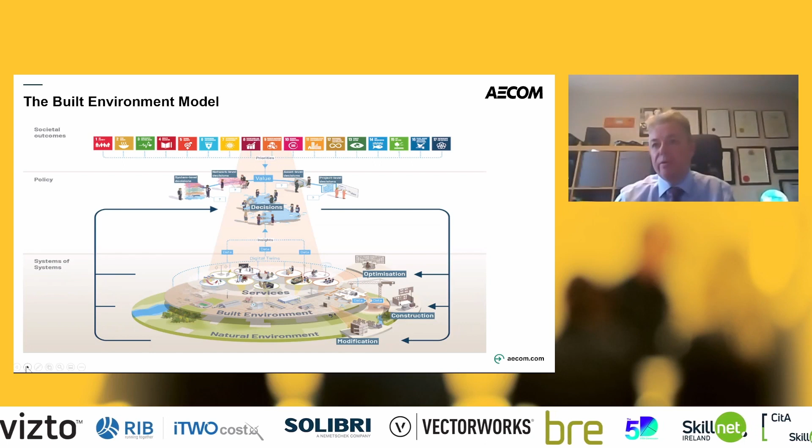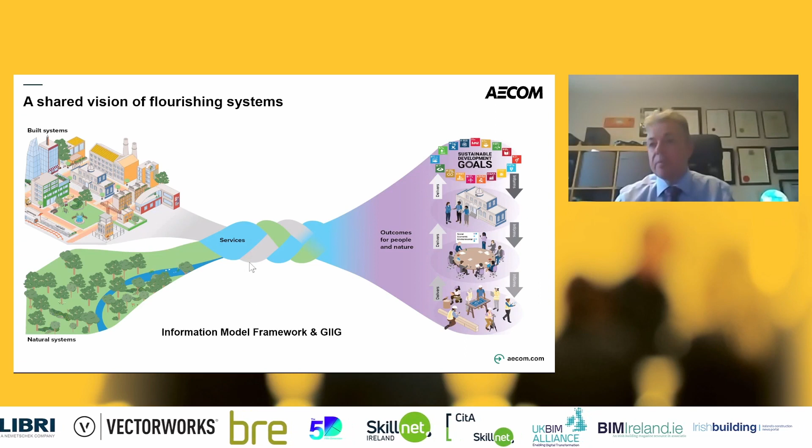This is built around what's called flourishing systems - a model that the Centre for Digital Built Britain and the Cambridge Centre for Intelligent Infrastructure put forward. As a central idea of the paper, which I think is seminal and radical, the purpose of infrastructure is as simple as human flourishing. Therefore, infrastructure should be viewed and managed as a system of systems, as we can see within the diagram.

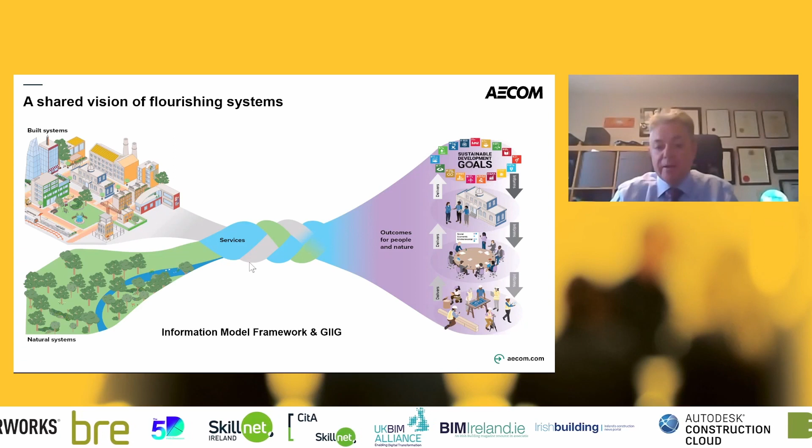Today is about people, isn't it? I think the purpose of infrastructure is to support and serve society. So we need to get a better understanding of, and deliver, the interconnected social, environmental, and economic outcomes.

You can see within there, this world of digital twinning is going to be key to it. We can start to make better decisions based upon real-time dynamic data, and think about better outcomes through better insights, decisions, and interventions.

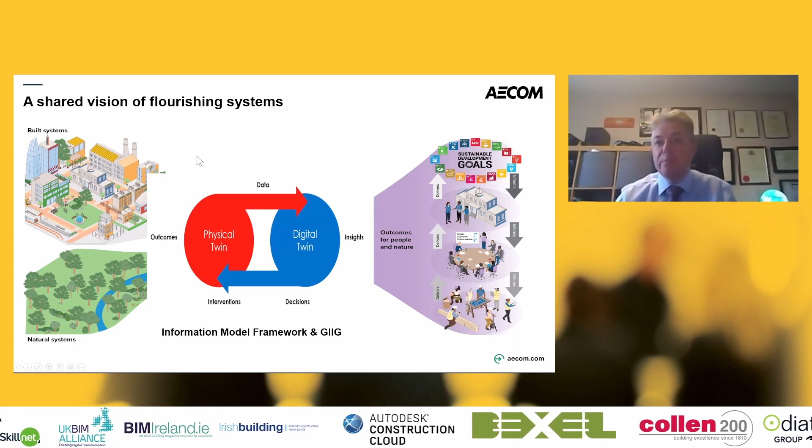But the real goal comes when we can start to federate all these models together. I'm sure we've heard over the week about our journey towards a national digital twin.

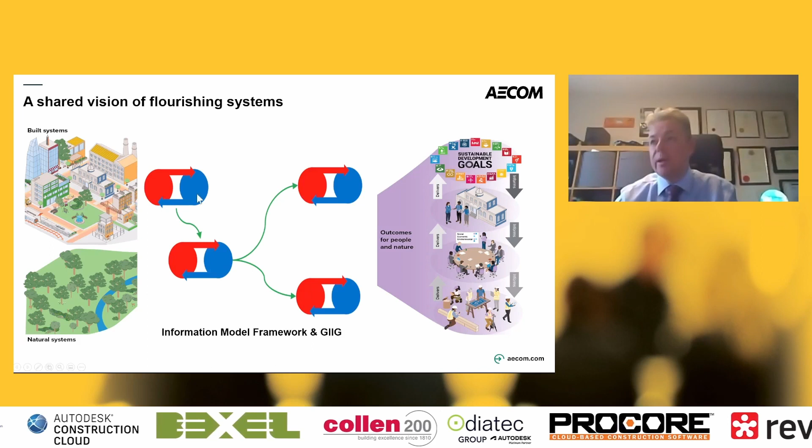Key to this, though, is starting to develop an information model framework of our higher ontologies. You'll hear more about what's called the GIIG, which is within the TIP - the government and industry interoperability group - to make sure we can better share information, which is hugely important as well.

But I think one of the biggest value drivers required is this: infrastructure has a key role in supporting economic growth and quality of life, but at a cost, and we've always got to remember that. The World Bank estimates that infrastructure construction and operations is probably 70% of our global emissions.

When we start to think about people coming in and innovation, they will want to win the battle in terms of emission reduction. We need to change our mindset in how we use our technologies and data to improve our client agenda.

When we talk about the change in mindset, there's something to look at - that was an industry, an organization that was so proud: 'Each day, Humble supplies enough energy to melt 7 million tons of glacier.'

Think about how much we've changed our values and behaviors around sustainability. And we talk about the future.

Would you want to come into an industry that has that? We've got to rebrand. We've got to make sure that we are aligned with what Generation Z wants, and make sure our industry is appealing to them. We've got to be unapologetic that as construction professionals we're starting to think about how we digitize.

We've heard from other speakers about automating within this, starting to think about Industry 4.0. It's a move towards greater digitization and automation. We're thinking more about prefabrication and advanced manufacture. In the UK, our government is moving more towards platform design and manufacture, and you can see these great sandpits we've now got, like the Manufacturing Technology Centre, which has changed how buildings and infrastructure are designed and manufactured.

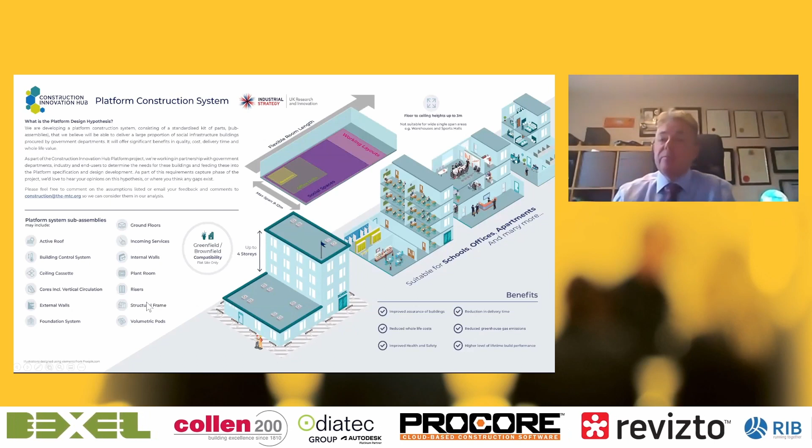So I think this is really important. You can also see our government project via the Construction Innovation Hub, which posits that over the next decade traditional construction will give way increasingly to Industry 4.0 and high performance manufactured options. One of the hubs was working with industry to create design-integrated standards that can be machine manufactured, focusing on kits of parts.

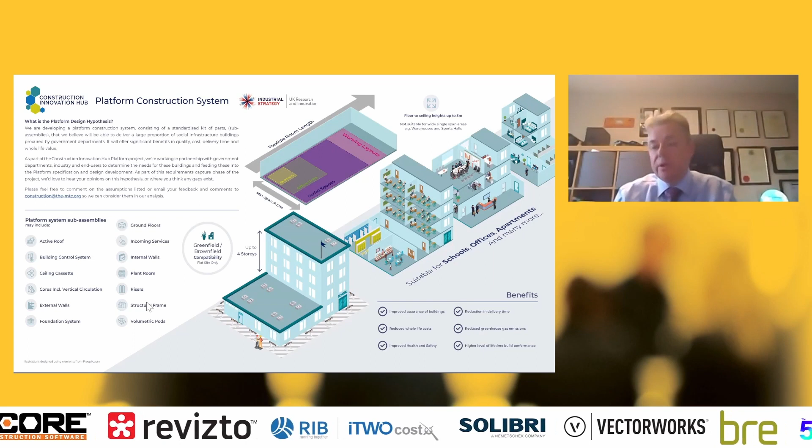You can see the sub-assemblies there. One of the big things, if we're serious about this, is also creating the rule books, allowing for integration, with some supporting multiple different types. I think these are hugely important.

And this is really important, isn't it? Look at other industries—we're competing against them, be it Formula One or biosciences, for the best talent. So we need to break the mold. We need to boost diversity within our sector and look at other industries, and we know we need to draw upon these talent pools as well.

Those previously underrepresented in the areas we need for our sector—we know we're going to have an issue if we don't address this. So the shift towards Industry 4.0 needs to be at the heart of our change, thinking about diversity. We must ensure our organizations are modern and actually have the values that will attract Generation Z.

For me, a big part of it is how do we start inspiring children from the earliest ages? How do we encourage them, their carers, their parents, to find out more about our sector, and give them constructive work experience, placements, mentoring, and connection to jobs. So I think unashamedly, we've got to start looking at other industries as well.

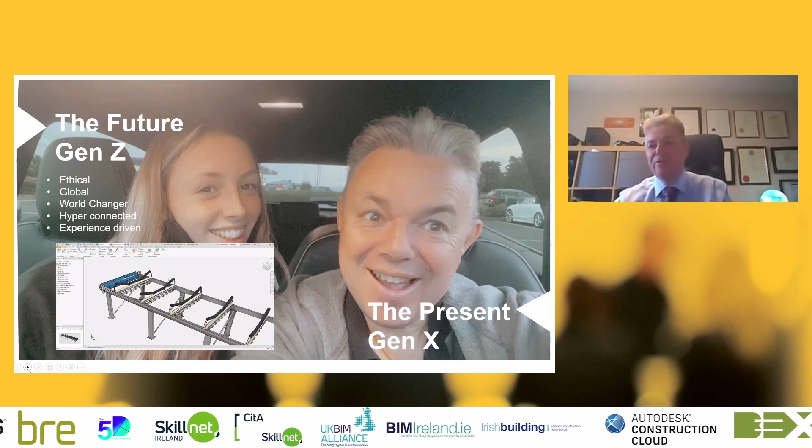And I spoke to her about what skills she'll need. What she said herself, as a Generation Z, compared to my Generation X, the journey is going to be different. It's going to be much more complex. I used to think it was T-shaped - you need to know about the whole built environment to some degree, be it planning, investment, construction, operation, asset management, still important. But she's got to learn about security, more about science and analytics, modern methods construction, probably some degree of coding, agile project management, and the science of innovation. But she's also got to stay as a disruptor, a storyteller, and a communicator. These are hugely important in her skill sets going forward.

One of the things I'd say today, it's important to create a future skills strategy. If you do one thing, think about coming to a conference, but do something different on the Monday. I think the CSIC Canvas is great for this. You start with your vision, ensuring a clear line of sight between what you want as a vision and all your agents for change in your ecosystem, and think about the strategy, how it might inspire people in the early stages of making career decisions. So, Mark, I'll post the link for this later, but it's a great canvas for organizations.

So in summary, I hope over the next couple of days you take time, over cafes - other drinks are available - to think about the future of your built environment. This is something I think is really important, I've used it a lot. It's from the Centre for Digital Built Britain, called 4 Futures, 1 Choice. It's a framework that provides a future lens enabling you to view with clarity and detail 4 potential scenarios of what the future could look like, depending upon the decisions you make now and in the future.